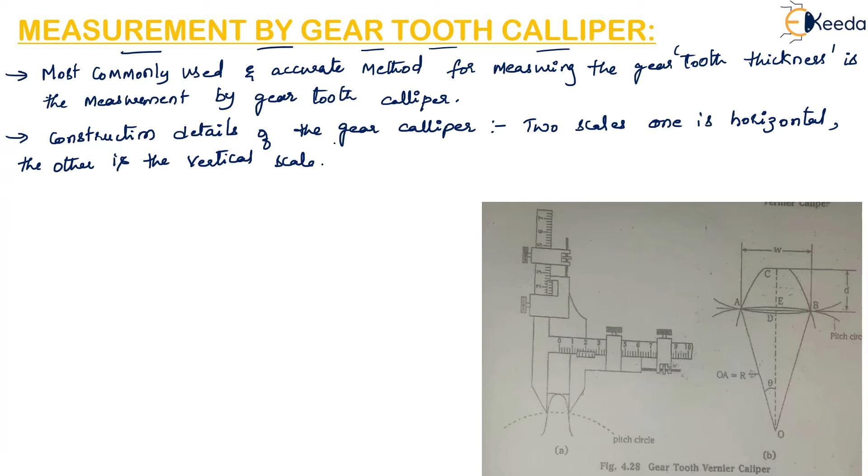So the illustration of the construction details of the gear caliper is as follows. It has two scales. One is the horizontal and the other is the vertical scale. This vertical scale gives the position of the blade which can slide up and down. So this is the vertical scale. It gives the position of this blade which can slide up and down.

When the surface of this blade is flush with the tips of the measuring anvils, then the vertical scale reading will be 0. So here there are measuring anvils, and when the surface of this blade is moving very close to it or it is flush with the tips of the measuring anvils, then this vertical scale reading will be 0.

This blade position can be set to any required value by referring to the vernier scale. So the blade position can be set at the required value by consulting or by referring to the vernier scale. So from this figure it is clear that if this is the tooth whose thickness we are measuring, it must be measured at the pitch circle.

So now the blade position is set to a value equal to the addendum of the gear tooth and it is locked in position with a locking screw. So when we are measuring the tooth thickness at the pitch circle, the blade is set to a value which is equal to the addendum of the gear tooth and it will be locked in position by using the locking screw.

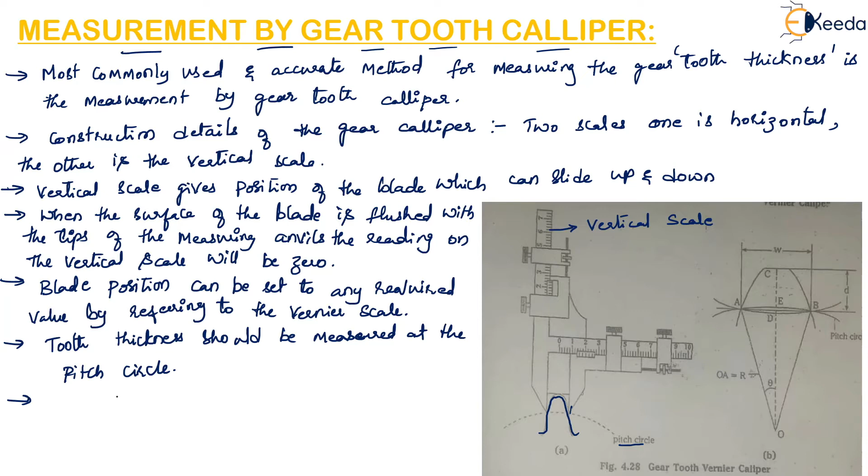The caliper is set on the gear in such a manner that the blade surface snugly fits with the top surface of the gear tooth. So here the caliper is set in such a way that the blade surface is fitting on the top surface of the gear tooth. So here you can see the surface of the blade is fit to the top of the gear.

Now the two anvils, these are the two anvils, are brought in close contact with the gear and the chordal thickness is noted on this horizontal scale. So this is the horizontal scale on which the chordal thickness is noted down.

Since the gear tooth thickness varies from the tip to the base circle of the tooth, the instrument must be capable of measuring the tooth thickness at a specified position on the tooth. So here we can see the thickness of the tooth is varying along its whole surface. So here there will be the base circle. From its tip to the base circle we can see the thickness is varying.

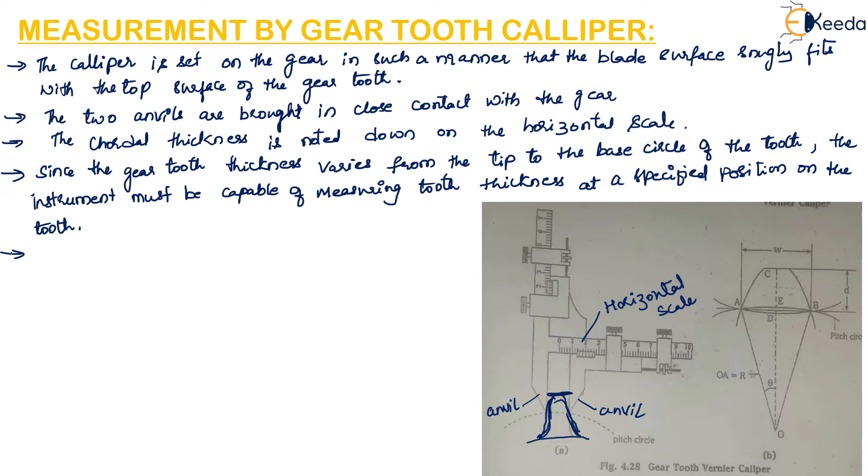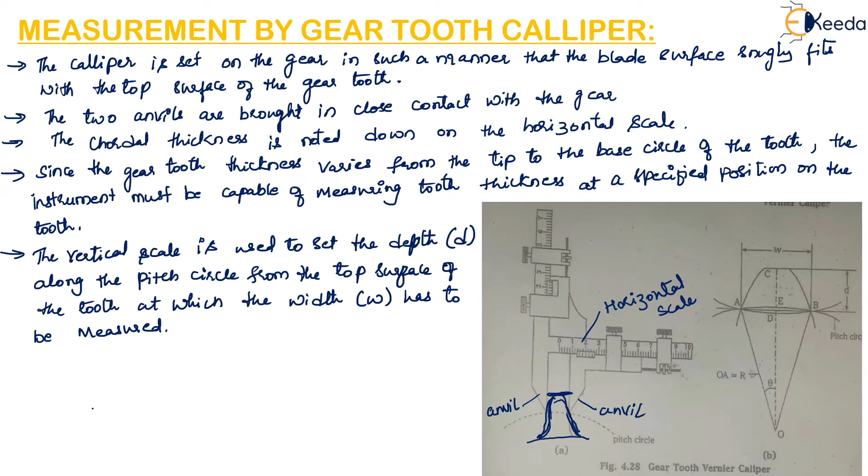Here the vertical scale is used to set the depth D along the pitch circle from the top surface of the tooth at which width W has to be measured. The vertical scale is used to set depth D along the pitch circle from the top surface of the tooth at which the width W has to be measured. This horizontal scale or horizontal vernier is used to measure the width of the tooth W.

By considering one gear tooth, theoretical values of the width W and depth D can be found out, which can be verified with the help of this instrument. So we have to consider one gear tooth and we can find the values of D and W, that is the depth and width, theoretically, and then we have to compare these values with that of the instrument.

So as shown in the figure, W is the chord ADB. So here there is a chord A, D and B. But the tooth thickness is specified as an arc distance AEB. So tooth thickness is specified by this arc distance A, E and B. So this is A, this is E and this is B.

Also, the depth D adjusted on the instrument is slightly greater than the addendum CE. So this depth D is slightly larger than this CE.

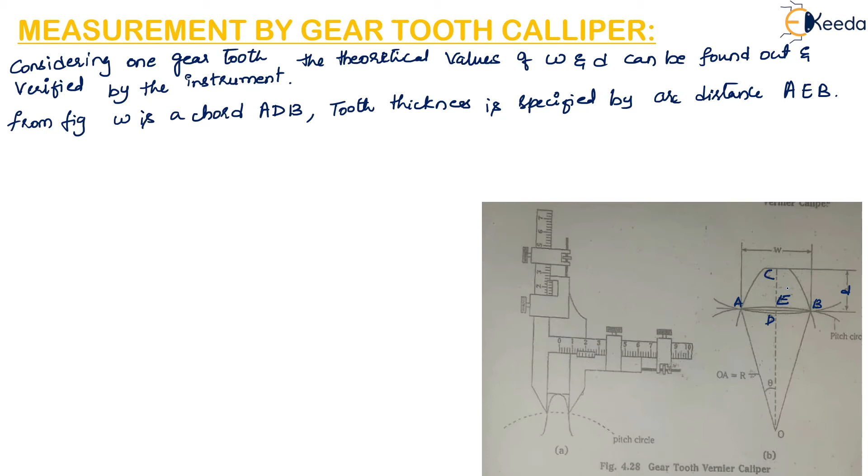So width W is called the chordal thickness and D is called the chordal addendum. So width W is called chordal thickness, and D, that is depth, is called chordal addendum. Therefore we can write W is equal to AB, that is 2AD. So W is equal to AB, that is 2 times this value AD.

So we know theta is equal to 360 degrees divided by 4n, where n is equal to the number of teeth. In triangle ADO, so this is one triangle A, D and O, W is equal to 2AD, that is equal to 2 into AO sine theta. So W is equal to 2AD, and instead of AD, we can write AO into sine theta.

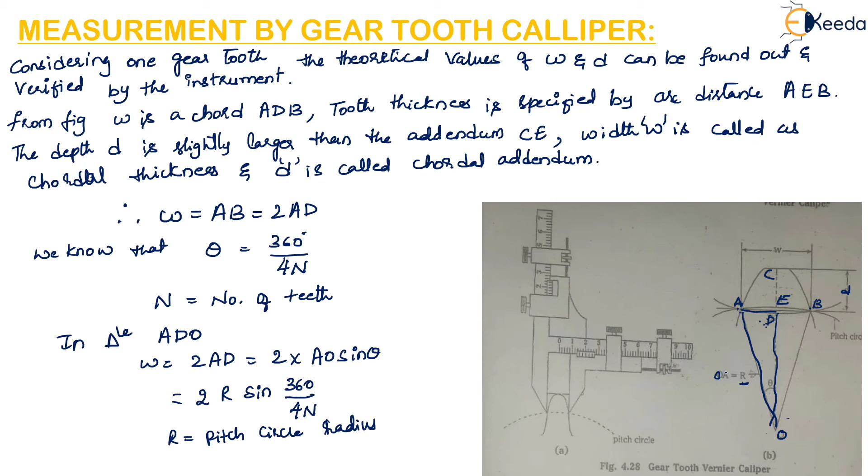So this is equal to 2R sine of 360 degrees divided by 4n, where R is the pitch circle radius. So here R is mentioned, that is OA is equal to R. Now module m is equal to pitch circle diameter divided by number of teeth. So that can be written as 2R divided by n. So therefore R can be written as number of teeth into module divided by 2.

So we have already found W, that is 2R sine of 360 degrees divided by 4n. So instead of R we will write nm divided by 2, into sine of 360 degrees divided by 4n, where n is the number of teeth. So we can write width as nm sine of 90 divided by n. So this is the value for the width which we have to find.

So also from this figure we can see d is equal to OC minus OD. So here this is C, this is D, and this is O. To get this value d, we can write small d is equal to OC minus OD, that is CD. Addendum is the radial distance from the pitch circle to the tip of the tooth, so addendum's value is equal to 1 module, but OC can be written as OE plus addendum.

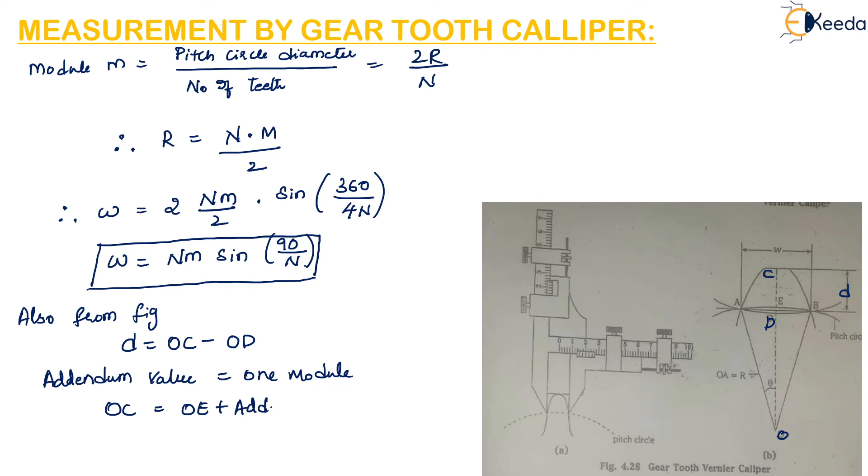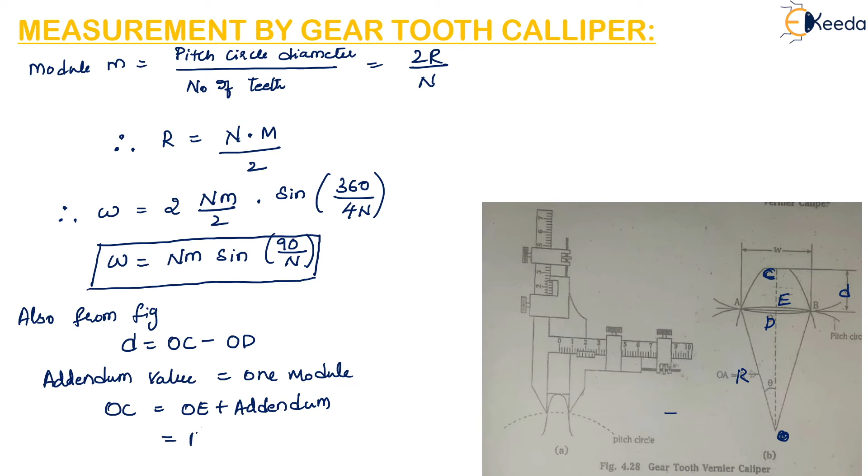So OC can be written as OE, so here there is E, plus the addendum value. Addendum is the radial distance from the pitch circle to the tip of the tooth. So OE we can write as capital R, which is given here. So R plus addendum. Now OC is equal to Nm by 2, since we have already found R as Nm by 2, plus addendum, which is equal to 1 module. So we will write it as small m.

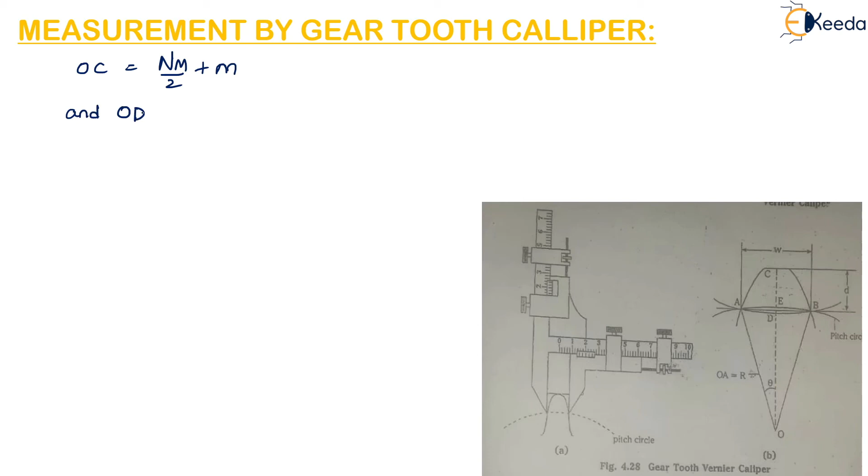And OD is equal to R cos theta. So this value OD, here it is O and it is D, can be written as R into cos of this angle theta. So instead of R we will write Nm divided by 2 cos of theta, that is Nm divided by 2 cos of 90 divided by n.

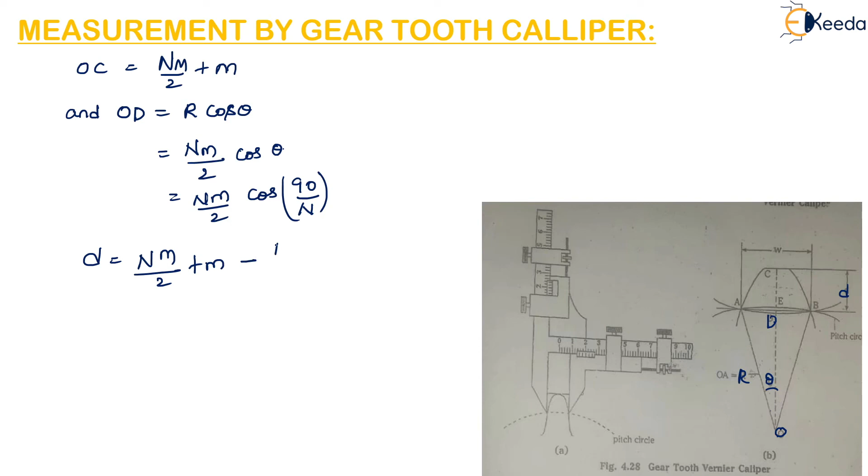If you want to find this small d value, we have to subtract these values, that is OC minus OD. So we have got OC as Nm by 2 plus module m, and we have to subtract Nm divided by 2 cos of 90 by n. So Nm divided by 2 plus small m minus Nm divided by 2 cos of 90 by n.

So therefore d can be written as Nm divided by 2 into 1 plus 2 by n minus cos of 90 by n. So this is how we find the value of this depth d. So this is about the gear tooth measurement with the help of vernier caliper.